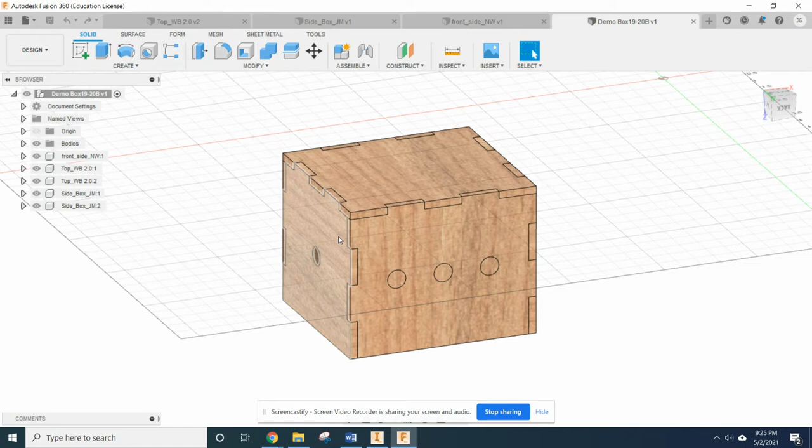So the past video or the last video had you exporting your files from your automata, your front, top, and side pieces, and they should be all done, and you should know exactly what folder those are in. If you don't know what folder those are in, find that folder or create a new one and start from there. Do not move files from that folder in that format once you've got them in that folder, okay?

Set them into a folder that you can name the file and find that file constantly, because otherwise it's going to corrupt things when it changes directories and paths, and it just gets a little messy. So please put everything in one folder for all of your Inventor stuff.

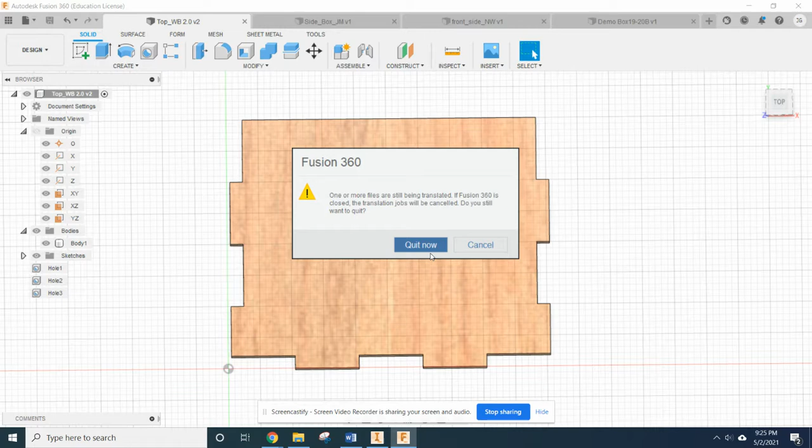So at this point in time, we don't need Fusion anymore. You close it. We're going to quit. Really? Still translating? Okay, you can still translate, but I've got all of my stuff that I need right there. I've got my front view, I've got my top view, and I got my side view. Okay, so that's all I need.

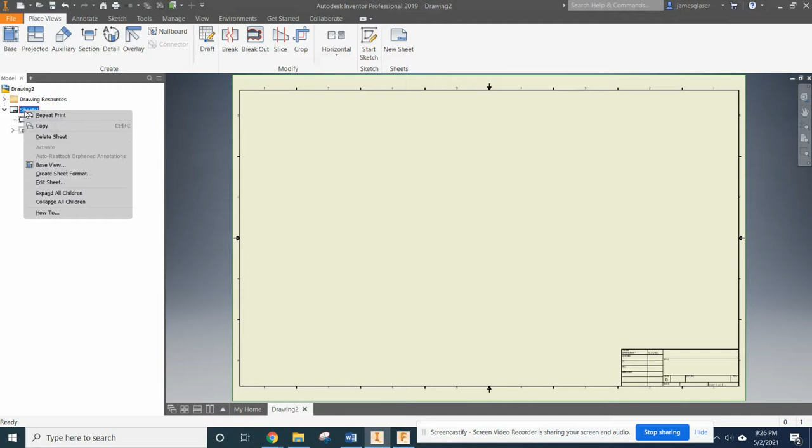Now to Inventor. You should have from the last video, it's pretty simple to get to the drawing screen. You just click drawing and it will bring you up with this window. We need to change this sheet. Right now that's an ANSI large. I think that's 36 by 24. We need a custom sheet size. So right click where it says sheet and select edit sheet.

And we're going to call this laser cut under the name, and the size needs to be custom. The height needs to be 12 inches. The width needs to be 24 inches. And make sure that it is in landscape format, because that's the way our laser cutter is.

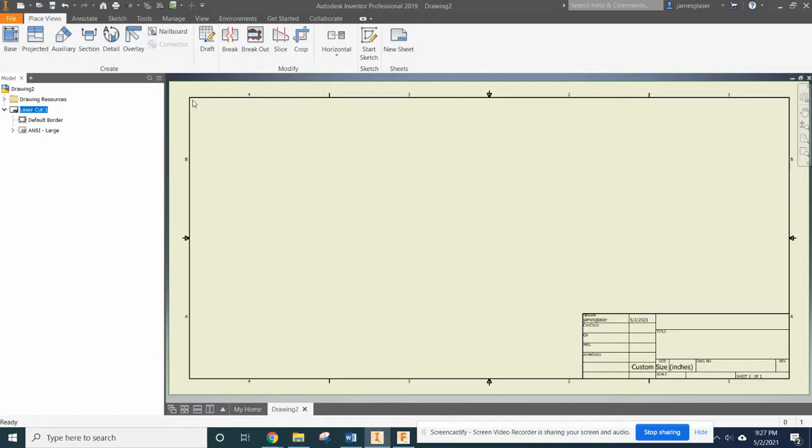Additionally, from here, we need to delete the border, delete, and we also need to delete the title block, because we don't need any of that stuff. Okay, come on, right click, delete, there we go, gone. So right now we have a blank sheet that is 12 inches by 24 inches. Okay, now we need to go ahead and place our first view.

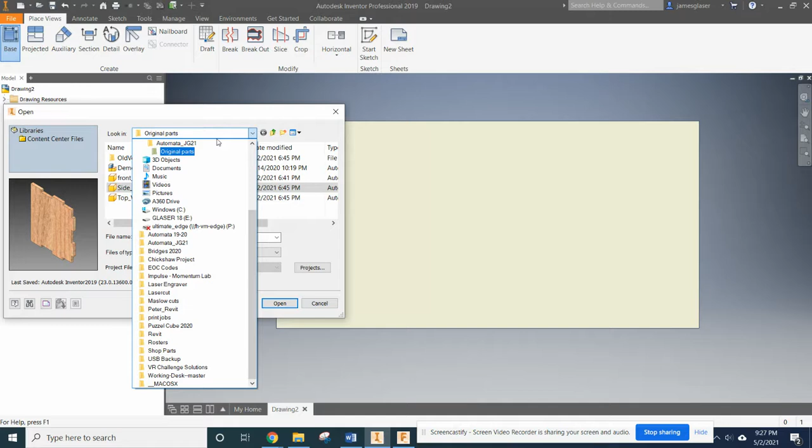Okay, so click base, and it's going to ask what file you want. Okay, so we click this little icon, and then you find through your file explorer, like mine is just on the desktop. I stuck it right here as Automata JG21. And now we want to pick a part. So I'm going to pick the front side of it. Voila, there is my part.

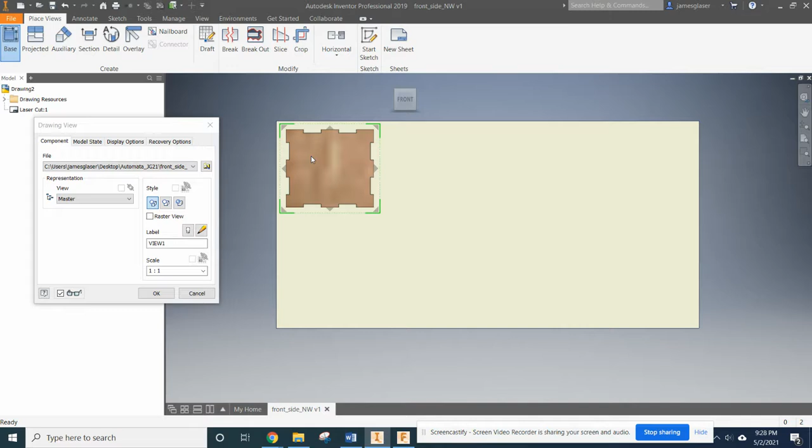Okay, now I'm going to move it right on over here, but I need to make sure that my scale is 1:1, and I need to make sure that I'm not showing anything crazy. And view 1, and you'll notice that my text isn't there because I didn't put any engravement onto this one. Okay, I'll show you how to put your name on this in a minute. Click OK, and it turns like that. That's exactly what I want to see on this thing.

Okay, now I'm going to just go ahead and I'm going to do the same thing with the side, only you know how you need two sides? Yeah, just click and drag that to wherever you want it. Make sure it's a 1:1. Click OK. And then since you want two of the exact same pieces, I'm just going to go ahead and say copy, and then right click and say paste and put it right there. Okay. Now, when you're placing these things, you want them to be fairly close together, and you want them to be just along the top or just along the bottom, okay?

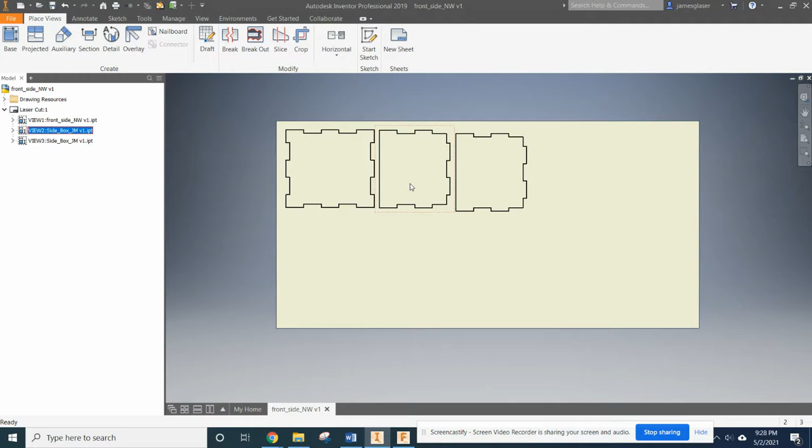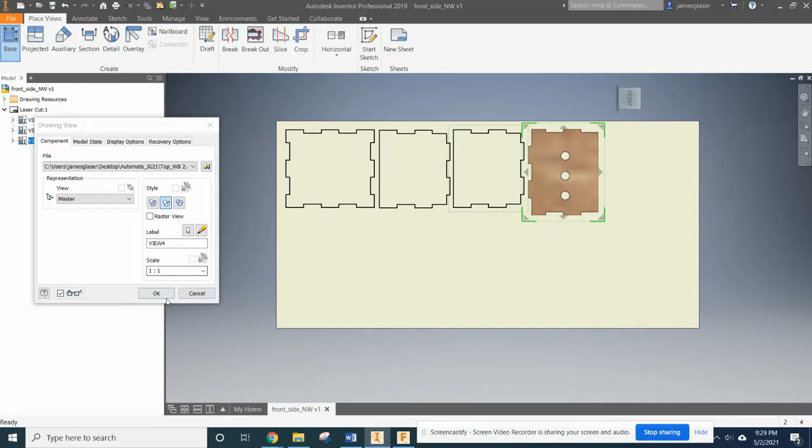And then we've got our front pieces, or I'm sorry, the top. There we go. Double click it. But you see how if I put two of these here, it's going to be 1 and then 2, it's going to be hanging over. I don't want to do that. So if I click that button, it'll rotate the view, and I can drop it right there. Okay? I like it. 1:1. Goody. All right, now I'm going to right click that one. I'm going to copy it, and I'm going to right click and paste it again.

Now, when you're setting these things down, you want to make sure you've got some space between the edge and where your item starts, okay? So if you think about this distance right here, this was roughly 1/4 of an inch. Make sure you're no closer than 1/4 of an inch to any side, okay?

Now, here's where the magic is going to happen. We're going to come up over here, and we're first going to go ahead and say File, Save As, and you want to make sure that you are in your Automata folder, okay? And we're just going to call this Laser Cut Layout or Laser Cut and your initials or your company initials or something along those lines, okay?

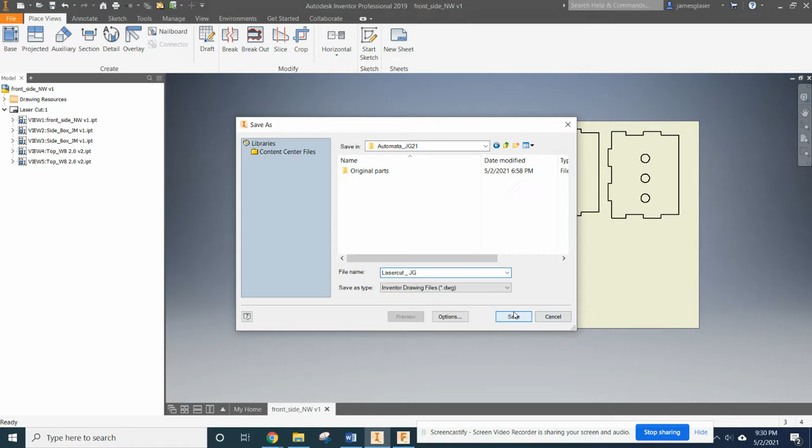So the name should pop out right there, and that should tell me exactly what this is useful for. The only thing you would use this drawing for is laser cutting. You would not adapt this to give any dimension drawings. We are not going to leave any dimensions on this thing.

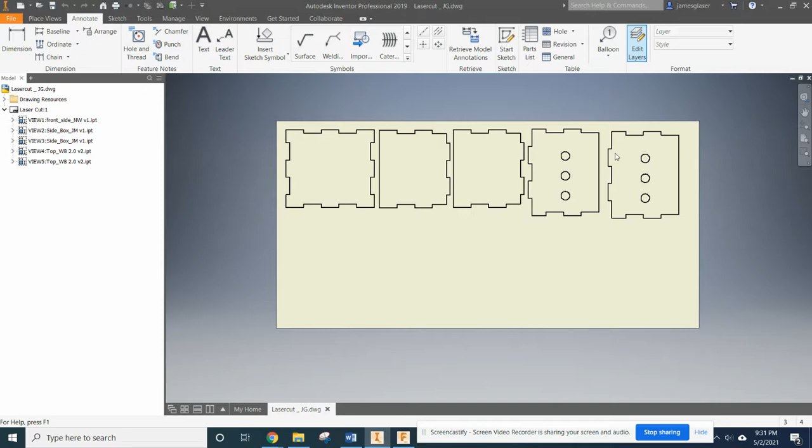So now I'm going to click Annotate here, and I'm going to come over here to Edit Layers, okay? It's going to pop up with a menu eventually. It runs a little slow when I'm screencasting.

We want to come over here to the visible lines, and you want to click the color. Now, yours is probably not going to come up with this red right here. If you click the red, and then you click Define Custom Color, we need that color to be 255-0-0. So 255 under red, 0 on green, 0 on blue. And you want to add that to your custom colors to make sure that it is the pure red.

Because our laser cutter program interprets pure red as one operation, and then pure red at a line width of 0.001, that is 1/1000th of 1 inch, tells it that it is supposed to do a cutting operation.

Okay, so this is a custom color. It should be a continuous line. Click Save and Close, and all of our lines should turn red. If it turns red, that means it's going to cut all the way through.

Okay, so if you put your initials in here or some emblem here and it turns red, you probably want to suppress that and then export that. Talk to me about that in a minute, okay, or call me over. I'll help you suppress that in your part file.

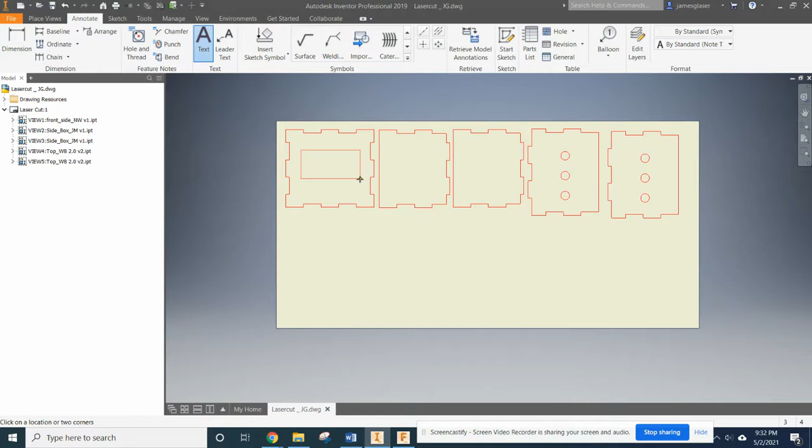Now, in order to put a text box here, okay, we need to be in this Annotate, and I'm just going to click and drag a text box right there, and it pops up with this menu. Okay, I'm just going to call this a demo box. Well, first off, I'm going to change my size of my letters, and I'm going to turn it to bold so it comes out better. And I'm just going to call it demo box.

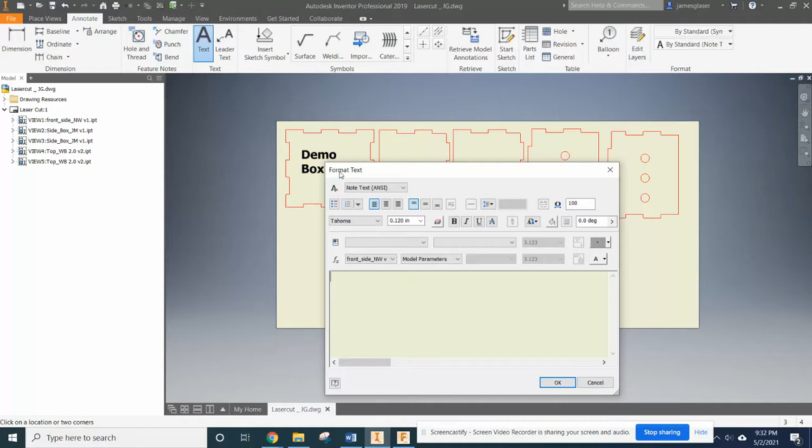Okay, and then cancel, I don't like how that's looking. So what I'm going to do is I hit escape to get out of the text box, and now I'm going to adjust, click on it to activate it, and I'm going to kind of finagle this thing so it's ish centered and ish looks decent. All right, and that's all we need to do on that.

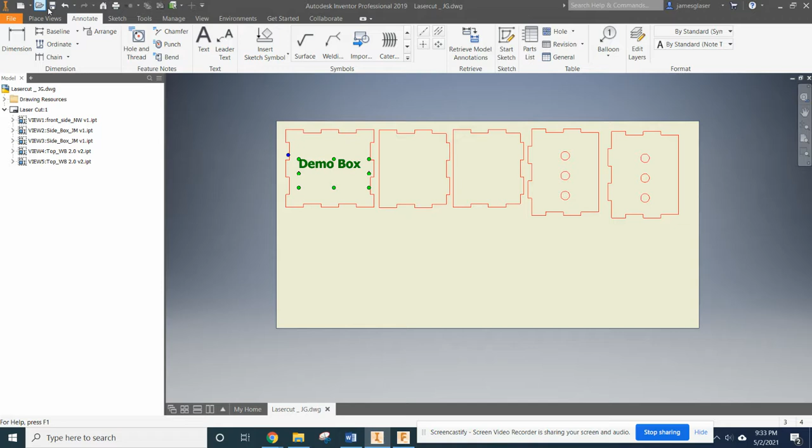Okay, so now go ahead and click Save. All right, now what you need to do is double check. You've got your front, you've got your side, and you've got your top. All of the parts that are in this drawing are in this folder, okay?

You will need to upload your folder, the entire folder, all of the files, to the Google Drive that I specify, okay? If you leave out any of the files, I will not be able to open and laser cut your parts, okay? So if you only have 3 parts, great, there should be 3 part files, 3 of these .ipts, and then your drawing, this DWG. If you have 4 parts, then I need 4, okay? Whatever parts you put into here, if the name appears here in this browser over here, I need that part.

Upload the whole folder to the Google Drive. I will go ahead and download the whole folder, and I will open the part or the thing that I need. Because what I'm going to do is I'm literally just going to come up here and click File, Print, and I'm going to select my laser, okay? And when I select my laser, I'm going to click OK, and then I'm going to come over here, and I'm going to select this box.

And you see how these lines all popped up red? That means that this thing, the laser, is going to actually cut through it, okay? It's called a vector operation. You see how these are black? That's a raster operation, that's a different power and intensity and speed of the laser.

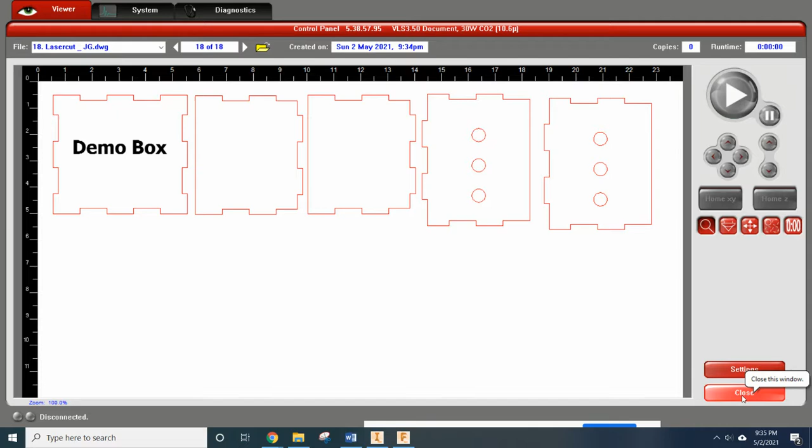So this thing is going to spit out correctly. I'm able to see that right now, right here. You guys, since you don't have the drivers for it, you can't do that. So you're just going to have to upload all those folders to the Google Drive for me, so that way I can laser cut these ASAP.

Once they're laser cut, you should be able to assemble them like they're a bunch of Legos. So hopefully you found this video to be helpful, and hopefully your box fits together nice and clean and does not require any kind of updates. So take care, as always, if you have any questions, let me know.